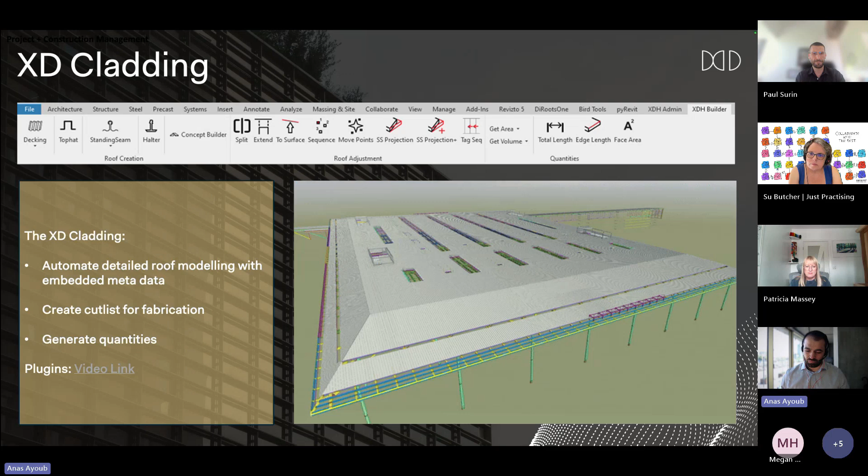So we just launched our new website, and I wanted to use that to showcase the kind of automation we're using right now through the products we're launching later this year. We're currently using some automation tools we've created internally to produce more drawings and models in a shorter amount of time, but also more efficiently, adding more sustainability measures, etc.

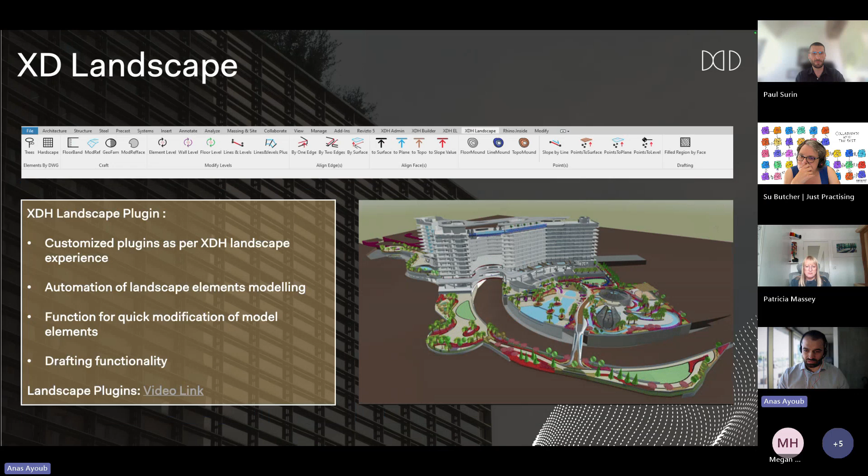So this is XD Cladding - we automate the process of building envelopes for cut lists, fabrication, etc. Another automation solution we highlight is XD Landscape. In general, we have these 3 products launching this year: starting from August we'll launch XD Landscape, then XD Cladding and XD Fit Out.

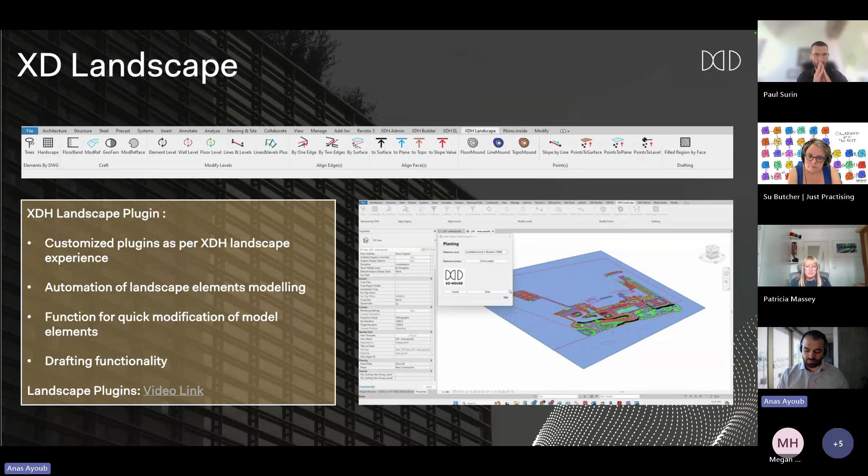We're trying to disrupt the market by simplifying our work. We just look at it from three perspectives: what's outside of the building, the shell of the building, and inside of the building, and then try to bring things back to basics.

One case study I wanted to showcase is the DFMA work we've done with Melbourne Quarter Tower in Australia. DFMA is a big term right now, and I'm glad manufacturers are being included more in design conversations. We delivered the design for fabrication, manufacturing, and assembly, working off-site to give them the cut list. 4D is about showing the sequence and logistics and giving data to all stakeholders to deliver on time.

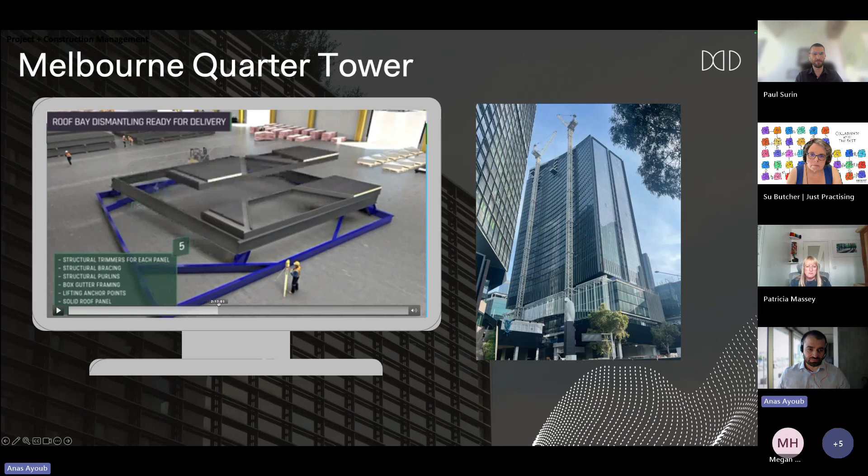This multi-layered roof, for example, was designed in segments. Once you reach that height on a high rise, you need all these safety measures in place, but also the accuracy and quality of the materials and engineering designed to be delivered and installed in the right manner.

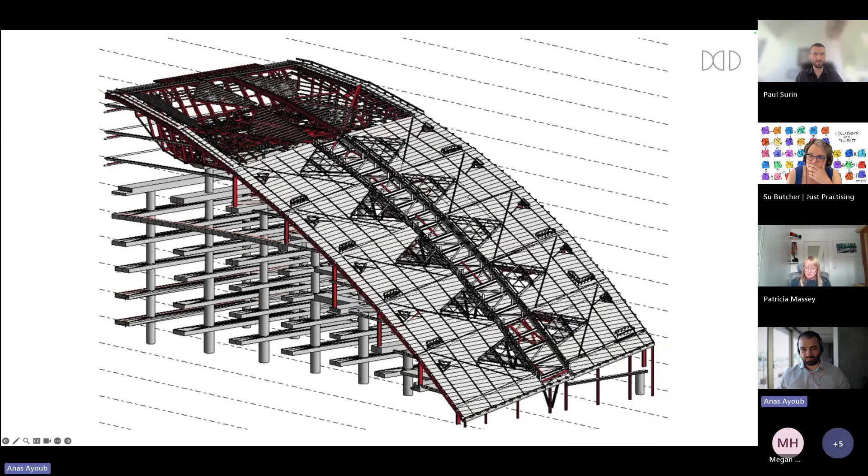So these technologies are not just a buzzword; they're being used right now in multiple projects. This is just a snapshot of the roof we worked on there, and this is a snapshot of the production of components we deal with to produce such.

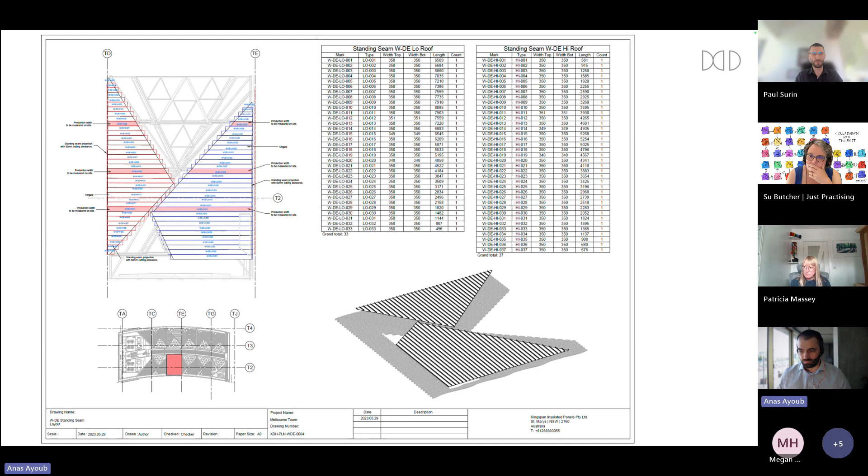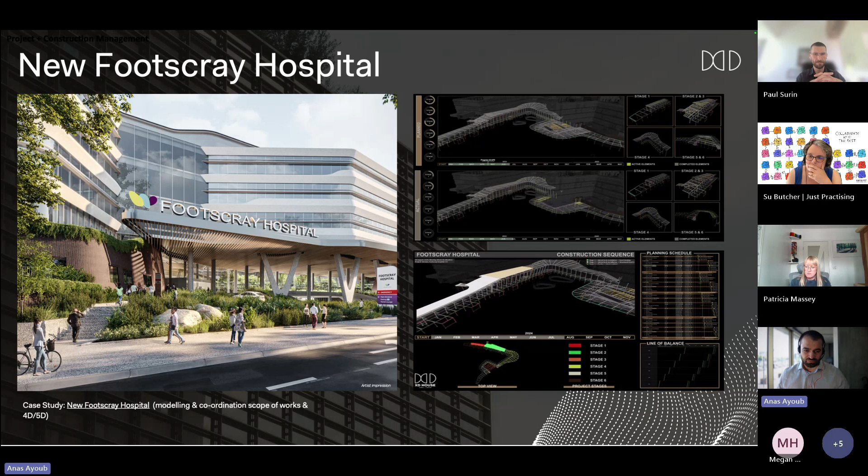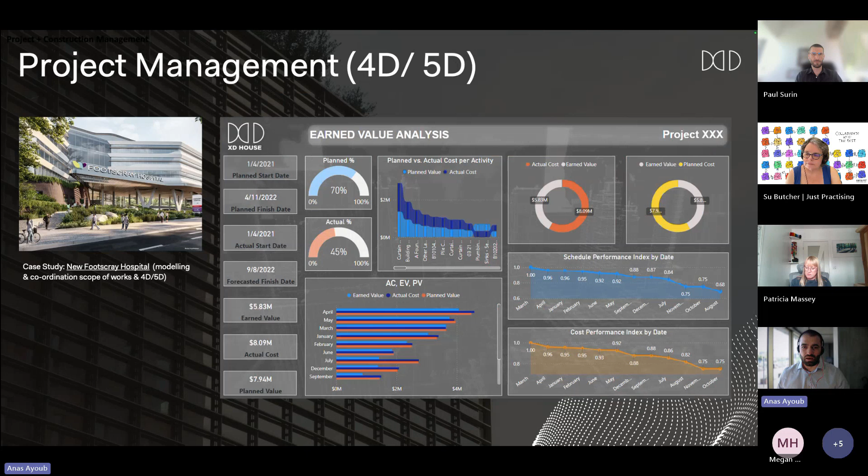Another case study I wanted to shed light on is the New Footscray Hospital, also in Melbourne, Australia. 4D is brought into the picture, where it can allocate more insight on priorities. Construction projects have a lot of changes during the delivery process, and having that kind of insight gives you more hands-on decisions when it comes to engineering, design approvals, procurement, and installation.

So we're trying to take automation not just for the sake of it, but also to provide the value we need to provide here, which is to enhance the built environment and provide value that can add to better decision making.

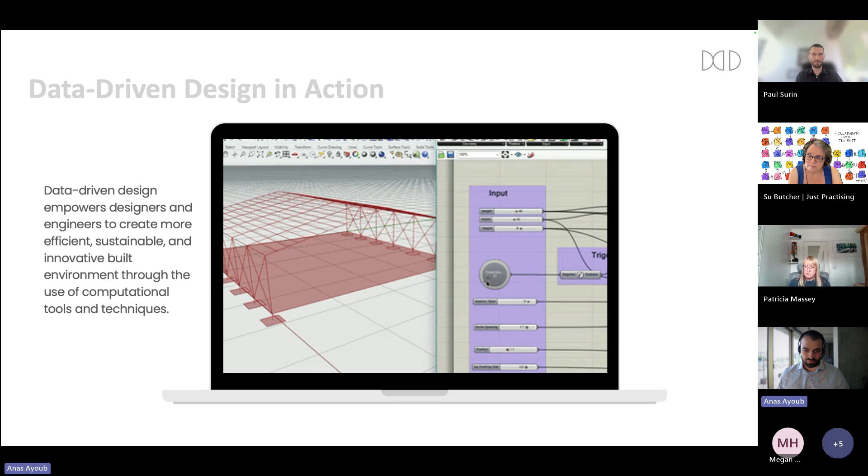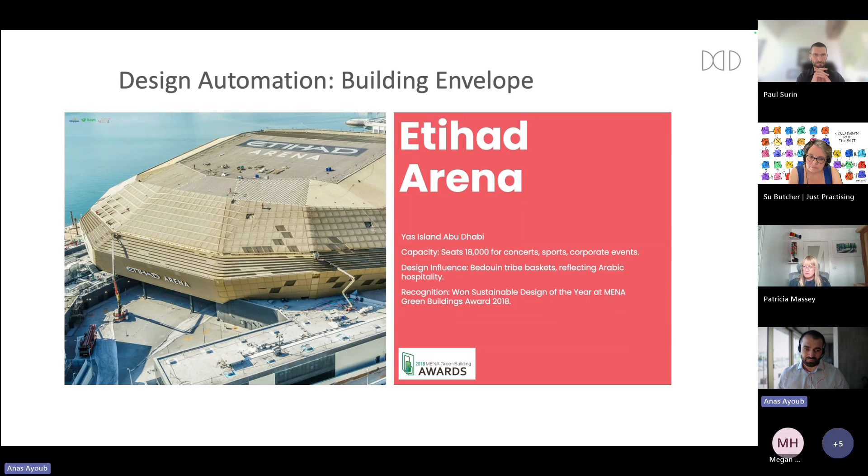Another insight here was the project we've done in Abu Dhabi in the Middle East, Etihad Arena. It's also an envelope multi-layered roof system and facades. We happen to automate the multi-layered projects here through these steps.

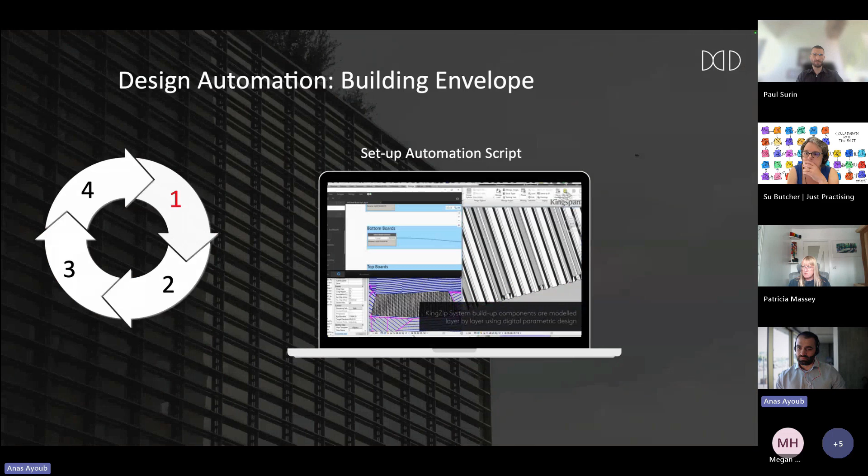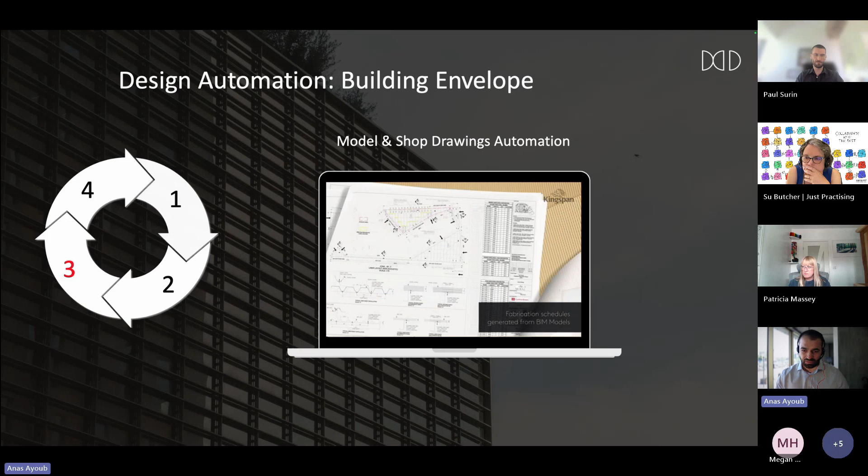First, we would model all the layers and then apply them to the facades, and then interface these corners and produce all these drawings and cut lists, just like what I showed you earlier on the other projects.

So yeah, we believe in automating the process, but also including everybody else in the process. That was just to shed light on how we're taking the AEC hat, wearing the digital one. We happen to be lucky to work on some of these projects, Paul, which you were probably part of the journey to see what we're doing. But happy to hear your questions. I'm not sure if anybody has voted any questions so far, but happy to discuss.

They have already, and we'll come to them when Paul's finished.

Yeah, so I'm going to share my screen. I'd like to show you some of the work we're doing. Hope you can see my screen.

This is a demo showcasing the use of a design tool built on the OpenAI and Microsoft large language model. It helps us review MEP or multidisciplinary consultant submissions, from drawings down to specification documents. This is an example of how the system can read specification requirement documents and put them into structured tables and a much more user-friendly interface.

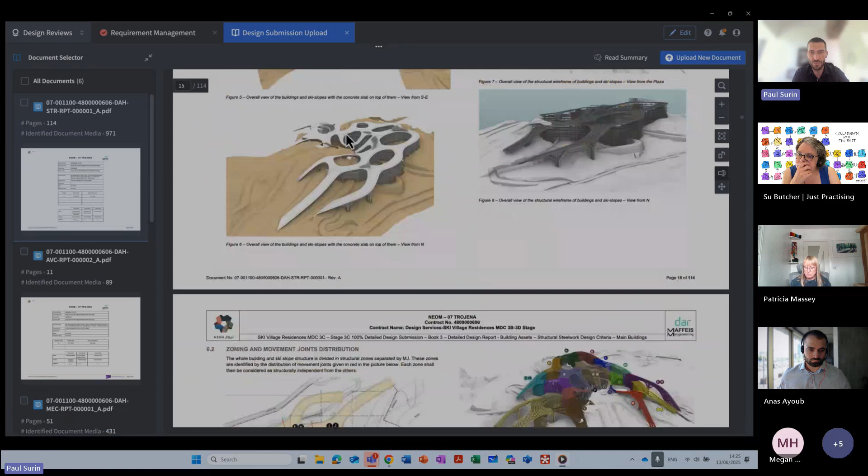Then what happens is this is one example of submissions, which would come through Aconex, through our CDE. The idea is that you only have 5 days to review - this is one document out of thousands, and you have 5 days during the stage gate review for a second cycle to review, which requires multiple users to be able to review the documents.

One of the things we wanted to do is allow design managers and engineering managers to simply chat, review documents, and iterate in their own plain language, without needing to go through multiple standards and requirements and compare them on a like-for-like basis.

In this case, it would be comparing close to 20 different standards. So we're loading up here 22 different standards. It would be anything from fire safety requirements down to specification requirements.

Then you would just submit the specification document, and it would start classifying it, grading from A, B, C, D, E, and F. This is our internal grading system for whether a document adheres to standards, semi-adheres, doesn't adhere, or doesn't mention anything at all. It would pick up, for example, zone four for cinemas, and show that the document does not adhere to the standard but mentions related information to discuss.